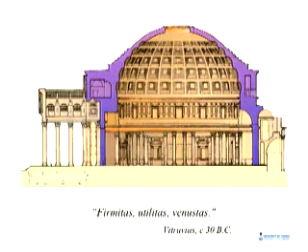These ideas are very old. The Roman engineer, architect Vitruvius, in a book he wrote in about 30 BC, described the requirements for structures as being that structures should have the qualities of firmitas, utilitas, venustas. That is, they should be firm, strong, they should be useful, and lastly, they should be beautiful. Venustas, the goddess of love.

Now, Vitruvius wrote this little book, addressed it to a young man who was about to become the first Roman Emperor, Augustus. And this young man, at the age of 19, had inherited from his great uncle, Julius Caesar, the right to rule Rome. But first he had to win a long civil war. And having won that, he began to reconstruct Rome. And that's why Vitruvius wrote him this book.

Because, as Vitruvius said in the preface, I have drawn up definite rules to enable you to have personal knowledge of the quality of buildings. For in the following I have disclosed to you all the principles of the art. This book was written so the emperor would understand the details. The Romans had a funny idea. This idea was that the person in charge should understand the details.

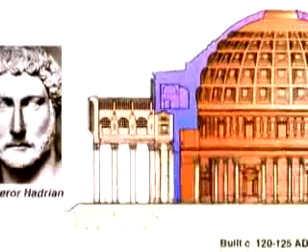But in this remarkable building, they went to 150 feet. This is Hadrian's Pantheon. Hadrian, I believe, was the greatest of the Roman emperors. And certainly under his rule, Rome had its best time, its best standard of living. And Hadrian was called the builder. And all over the empire he built fantastic structures. And in Rome he built the greatest of all Roman structures, this building.

It's a dome made of concrete. The Romans knew about concrete and were masters at using it. And this building has a span, the roof has a span of 150 Roman feet. And the height is 150 feet. So a perfect sphere could be placed inside the building and would just touch the floor and go to the roof. The light comes in through the oculus, 30 feet in diameter.

Imagine walking into this building. If you go to Rome, do it. It's a fantastic building. But it's designed to impress from the inside, not the out. When you walk inside, you see something that's 15 stories high and 150 feet in span. That was the biggest span until a building was built in about 1880 that had a slightly bigger span. So for more than 1,700 years, this was the biggest roof in the world.

This is what it looks like inside. It's awe-inspiring, and it's meant to be. People have commented on it. For example, Byron said, "Simple, erect, severe, austere, sublime, shrine of all saints, temple of all gods, spared and blessed by time." And Shelley said, "It is, as it were, the visible image of the universe."

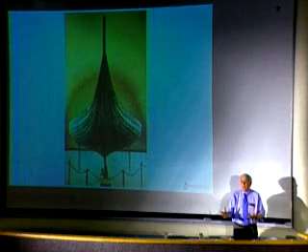It has been called the most beautiful object ever made by man. But it wasn't made as a work of art. It was made as a warship. It was a terrible weapon. It terrified Western Europe. A prayer of the time was, "From the fury of the Norsemen, O God, protect me." They could reach anywhere that was accessible from a decent river, because these had a very shallow draft. This particular vessel had 32 oars, but the really big ones had 70 ferocious Scandinavians coming out of these.

The Norse sagas talk about them, and I'd like to read you a few lines from one of these sagas about King Harald.

One Saturday, King Harald hauled down the long deck awnings, and Trondheim women proudly watched the ship glide past. The young sea king was steering his new ship down the Nid, while battle-hungry warriors dipped oars into the water. Norwegian arms are driving this iron-studded dragon down the storm-tossed river like an eagle with wings flapping.

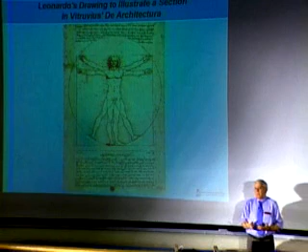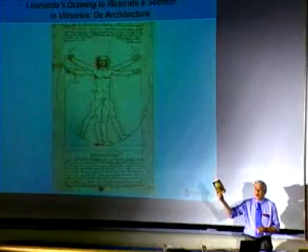The people of that time looked back upon the ancient learning, and they tried to understand how the Romans had done it. And one of the things that happened was in a monastery at St. Gallen in Switzerland, they found a good copy of Vitruvius's manuscript. It had been copied many times, but it was much better than any other they had. Unfortunately, the figures had been lost.

And so a young man in Florence, reading the text, drew his own version of the figure that obviously should have accompanied it. And this is from a part of Vitruvius which tells Augustus that the different parts of a building should be in proportion, one to the other, as the parts of the human body are.

And so he says, for example, that the hand from the bottom of the palm to the tips of the finger is exactly 1/10 of the height. And the distance from the bottom of your chin to the bottom of your hair is exactly the same. So put your hand here, it should fit. And Leonardo drew a figure which had all of these proportions that Vitruvius gives. Leonardo was in his late 20s when he drew this, and it's believed he used himself as the model.

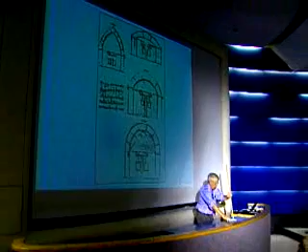Here he's looking at arches, and he's asking the question, what is the force required to prevent each of these arches from giving way? When we push upon an arch, what happens is it tends to go down. So if I push, the arch goes out. And to stop the arch going out, I must hold it here. And that's called the abutment force. And unless you hold it there, the arch collapses.

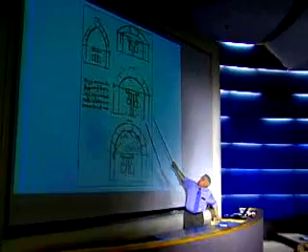And Leonardo asks, what's the force? How do I calculate the force? And he does experiments. And he sees that a very flat arch requires more force than a high arch. And he suggests it's got something to do with this angle. And he's on the right path there.

Towards the end of his life, he wrote a proposal to Sultan Bayezid of the Ottoman Empire, who was desirous of building a bridge at Pera in Constantinople across the Golden Horn. And here in his notes he says the bridge of Pera at Constantinople, 40 brachia wide, which is about 60 feet, 70 brachia high above the water, 600 brachia long, that is 400 over sea and 200 on land, thus making its own abutments.

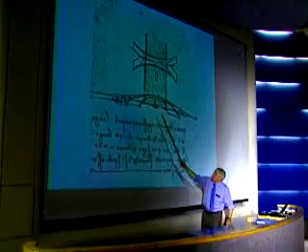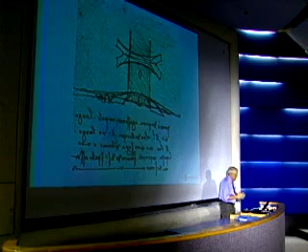He's proposing an arch whose rise is 1/3 of its span, and he's proposing an arch with a span of 600 feet. And the Romans had difficulty with 120. And so it's not surprising that Sultan Bayezid decided to give this proposal a pass, and he built a floating bridge. But about 3 years ago, some engineers in Norway had this bridge built as a highway overpass, a small model of it, and it worked very well. Leonardo's lines are correct.

Sultan Bayezid's successor was Suleiman the Magnificent, the greatest of the Ottoman leaders. And he had a court architect called Sinan, a master builder. And Sinan had a school within the palace to teach people building. One of his pupils became an engineer, and his name was Hayrattin. And Hayrattin built this bridge at Mostar in Bosnia. And Mostar means bridge, just the way Alcantara means bridge.

And this bridge has been called the most beautiful and the boldest of all stone bridges. It's bold not because it has a big span, but because it's very slender. The thickness of the arch is only 1/37 of the span, whereas for a typical Roman bridge it would be about 1/15 or 1/20 of the span. It's a testament to the virtuosity of Turkish engineering at that time.

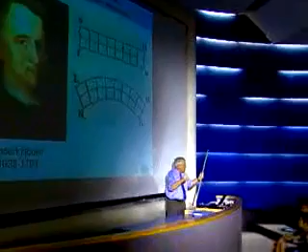So they wish to head back. There is a stable position. And if you disturb them from that stable position, they try to go back. They act like springs. And he has it right. This is still the basis of our modern engineering theory of beams.

Hooke was deeply involved in rebuilding London after the Great Fire, and this is one of his few surviving buildings. It's his monument to the Great Fire, built of Portland stone and 202 feet high. You can go up inside it, and there's a viewing platform on the top.

His greatest friend was Christopher Wren, and together they were involved in many of the major structures, to rebuild many of the structures in London, the most significant being St. Paul's Cathedral. And so Hooke turned his inventive genius to the question that Leonardo had asked: what is the true abutment force?

And Hooke published his theory with this introduction: this is the true mathematical and mechanical form of all manner of arches for building, with the true abutment force necessary for each of them, a problem which no architectural writer has ever yet attempted, much less performed. Here's the correct form, and here's the correct magnitude of the abutment force. And here's his theory.

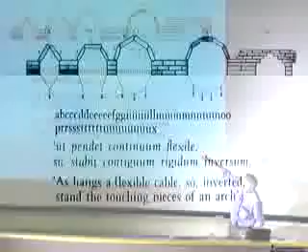So what he did was publish 10 of his inventions in the form of anagrams like this, just the letters in alphabetical order. And he described each one. What I just read you is what that theory is stated here. He said, here's my theory for the true theory of arches. Now, if you know the true theory of arches, you tell me what it is. But if you don't, don't claim later that you did, right?

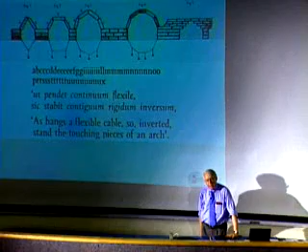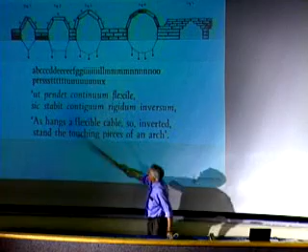And some years later, he published the solution. Here it is. These are those letters just rearranged. These letters in alphabetical order make that. And this is the English translation. As hangs a flexible cable, so inverted stand the touching pieces of an arch.

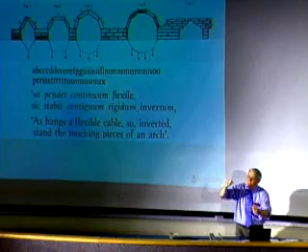If you want to know the right shape of an arch, hang weights on a cable and turn it upside down. Because a cable can only take tension, and an arch should only take compression. The arch is not good at resisting bending, and the cable can't resist it at all. And it's brilliant.

Hooke kept a diary, and his diary for June the 5th, 1675 says, at Sir Christopher's, he was making use of my principle about arches and altering his model by it.

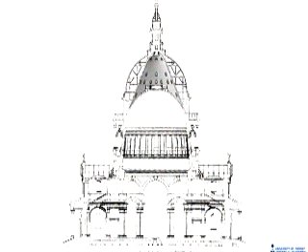Here's Wren's great building, St. Paul's. And the dome is the brick cone, which is inside, shaded there, and that's holding up what's called the lantern, which is 800 tons of stone on the top, which really holds the top down against wind force.

Designed by Hooke's theory. And, by the way, Hooke supervised the construction along with Wren.

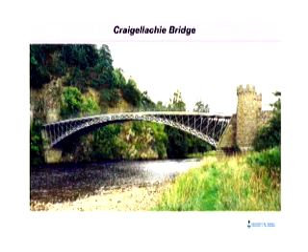Telford went back to his native Scotland, and over the next 20 years he built about 1,000 miles of road and 117 major bridges, most of them beautiful arch bridges like this, stone arches, but some essentially small models of his London Bridge. This one, Craigellachie, over the River Spey, Speyside. This is where the whiskey comes from. Beautiful bridges, elegant.

He finally got his chance to build a great bridge in 1820 across the Strait of Menai, joining the island of Anglesey in northern Wales to the mainland. 500-foot span, and he built a suspension bridge, the first of the modern suspension bridges.

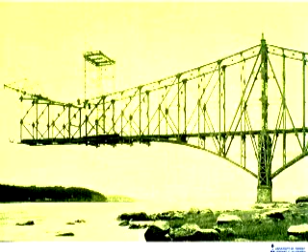And unfortunately, they didn't work quite the way he'd assumed. And these members, under the push, buckled like this. And that buckling brought the bridge down like that. And 76 men died, if you can call a 14-year-old boy a man, who was the youngest who died. In the commission following that, our first dean, John Galbraith, was the technical expert, led the technical investigation, and placed most of the blame on Cooper.

Two Canadian engineers, Johnson and Duggan, then took over, founded the Dominion Bridge Company, and that company built the replacement bridge from 1910 to 1918. And when it was finished, it was the largest bridge in the world, 1,800 feet. It contained 2.5 times as much steel as Cooper's original design.

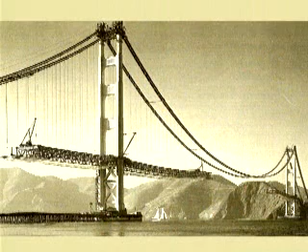But he worked on it, and a few years later he evolved a very elegant bridge, what has been called the Mona Lisa of bridges, the Golden Gate. Here it is under construction. It's a difficult thing to work out all of the loads that come on such a structure. An earthquake might happen, a ship might hit a pier, the wind will be high. How do you ensure the bridge is safe under all these conditions?

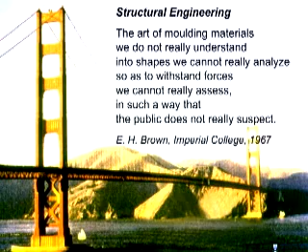I gave you a definition of structural engineering at the start of the lecture. I'd like to give you a more honest definition now that you know a little about it. Structural engineering is the art of molding materials we do not really understand into shapes we cannot really analyze, so as to withstand forces we cannot really assess in such a way that the public does not really suspect. And that's really what it's about. It involves a lot of unknowns and a lot of judgment. It's not just a mechanical set of calculations.

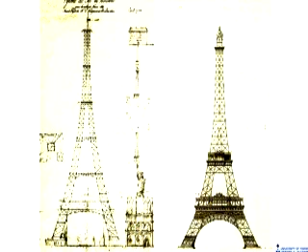At about the time the Forth Bridge was being finished, the Eiffel Tower was being built. And that tower used reinforced concrete as its foundation, a new material, steel combined with concrete. And a young man was doing classes at a great university, the Swiss Federal Institute of Technology, ETH, in Zurich. And his name was Robert Maillart, and his professor, Wilhelm Ritter, was one of the first professors to teach reinforced concrete. And Maillart became the greatest concrete designer of the 20th century.

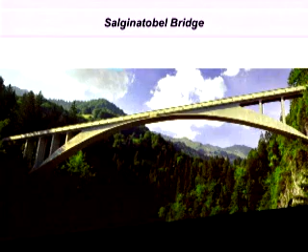And this is his masterpiece, the Salginatobel Bridge in Switzerland. It's a little masterpiece. I mean, the Golden Gate Bridge cost $36 million at the time, which in today's terms would be $400 million. The Salginatobel Bridge cost 150,000 Swiss francs, which was probably about $50,000, not $36 million.

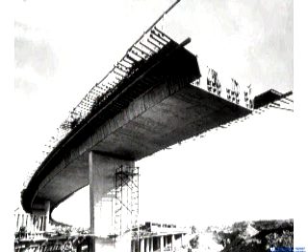At about that time, 1930, that's when Maillart's bridge was finished, a Frenchman called Eugène Freyssinet came up with the idea of pre-stressing concrete before you load it, putting high-strength steel cables like Strauss used for the Golden Gate Bridge, and stretching them and clamping the concrete together so it could resist tension more effectively. Concrete and stone are very good if you squash them, but nowhere near as good if you pull them. This material revolutionized the way we use concrete.

And we have a local example. This is a pre-stressed concrete structure, the CN Tower. It's still the tallest freestanding structure in the world at 1,815 feet. I'd like to finish by just talking a little bit about some pre-stressed concrete offshore structures that I've been lucky enough to be involved in. These are called Condeeps, concrete deep water platforms. And here's one of these being towed out to sea.

And I'd like to read you what a Norwegian woman, a poet, Gidske Anderson, on the Nobel Peace Prize Committee, wrote. A huge reptile in the fine rain mist, the giant legs protruding out of the water with the platform towering above. It's a magnificent sight. And in these days when we hear that for the first time in hundreds of years, Norway may no longer have a merchant fleet or a seaman's trade, there is something hopeful about these exact and mighty platforms that sail out of our fjords. I don't know much about the mammon-influenced world of oil, but the engineering art displayed in these platforms truly impresses me.

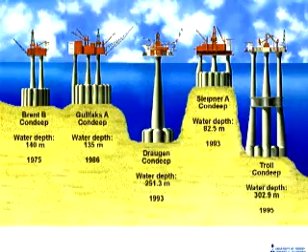But I want to talk about this little one in the middle there, the Sleipner platform. And when they put the top on, they sink these platforms almost right beneath the water, and then they float the top over them. And when they were doing that in Sleipner, one of the walls failed, and the platform was destroyed. And here's the cover of the Norwegian engineering magazine, which says, "From an engineered cathedral to concrete scrap." It had taken them 3 years to build that. And there was a mistake, and it was destroyed in about 20 minutes.

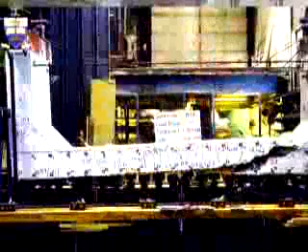It was destroyed because of a shear failure, not a bending, but shear when you go like that. And we're not very good at designing for that. We happen to study it at the University of Toronto, and that's a shear failure of concrete you're seeing there. And so the Norwegian engineers came here, so we could help them solve their problem. And in just 18 months, they redesigned and rebuilt a replacement platform, and there it is in the North Sea.

Last June, there was a huge gas pipeline joined to it from England. It's going to bring gas from Norway to England. These platforms are designed for the unknown forces that they may get in a huge storm. And we also have to design our structures for natural catastrophes like an earthquake. Here's one of the local technical magazines, you may have seen it, the Toronto Sun, describing the results of a Japanese earthquake. And we also have to worry about the impact of planes on our structures.

And the structural engineer who designed the World Trade Center, Leslie Robertson, he worried about such things, so he designed his platforms for the impact of a plane. He thought maybe in a fog, an airplane looking to land, circling around, would hit his structure, so it was designed to resist that. He didn't think of an airplane going at full speed, hitting it. And of course, we know what happened. Here's Les Robertson. He was about 36 when he did this design. And here's what he said in an interview in October of 2001.